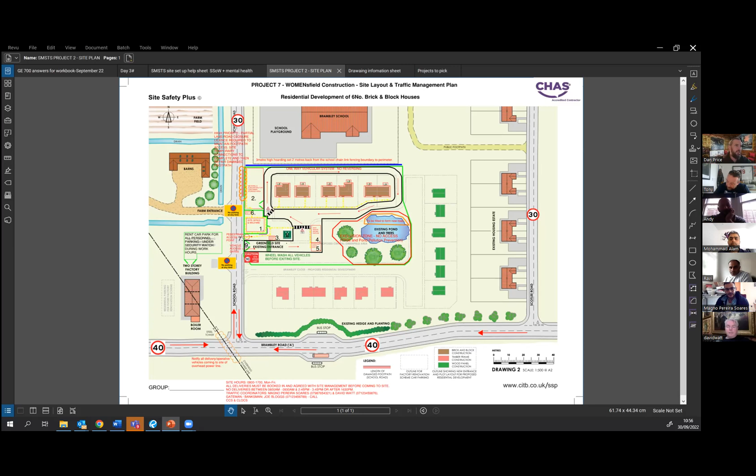So a little bit about the site plan, location and plan. Just to double check, you can see the screen and the layout here. The site is on the outskirts of the town of Bramley.

Our site here in the middle, these six plots of traditional brick and block construction is what we are building. Our green line denotes the perimeter and our site security. A little bit about the site: we've got a two-story factory building to the southwest corner, and there is planning consent for 18 housing on the greenfield site, 6 of which we are building. These 6 green buildings here are to be built, and these 6 pink are already built. So we're having to work in and around a live site.

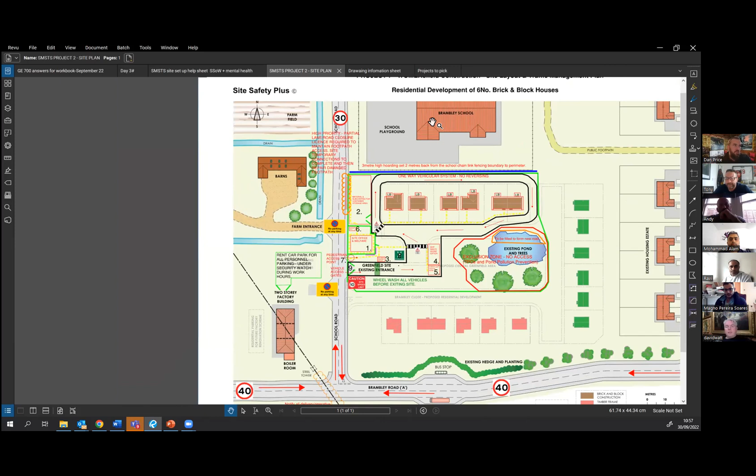Also to the north of site there is a school playground and a farm entrance here, which requires 24 hours, 7 days a week access, and some existing houses. Bordering the site is Scoter Road, a 30 mile per hour restriction, and 40 mile per hour on Bramley Road to the south, with an overhead power line which we'll have to coordinate and communicate with our supply chain and delivery vehicles to ensure they're aware of when coming to site, lorries etc. Then we have School Road, which gets very busy during school hours.

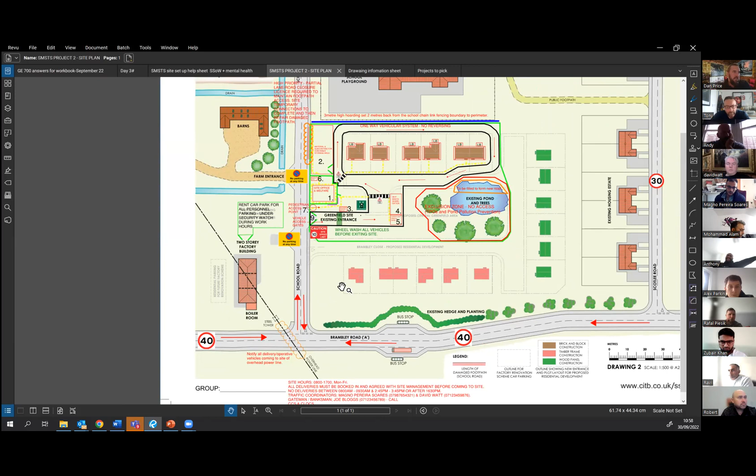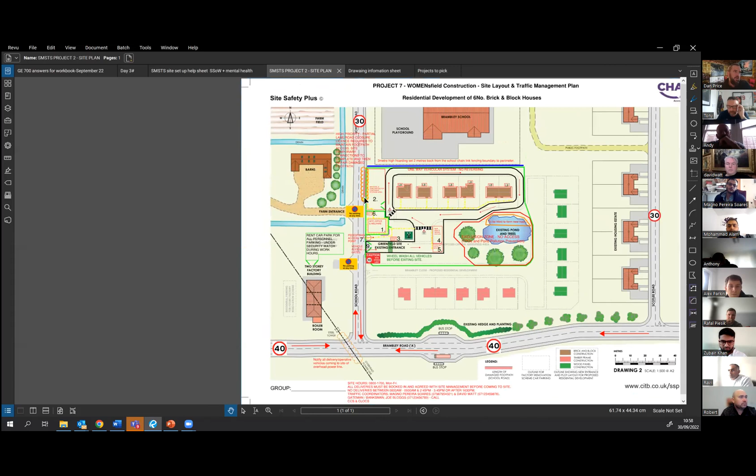So we've got certain restrictions, but I'll go through that later with the traffic management plan. There is a public footpath at the top here, which 60% of pupils use to get to the school. The other 40% use the path running by the site. So we're going to have to coordinate and carry out some works, and this section of pavement here is in need of repair.

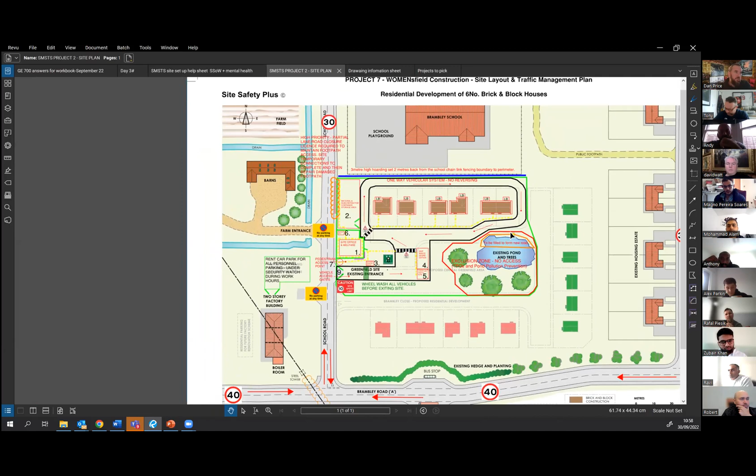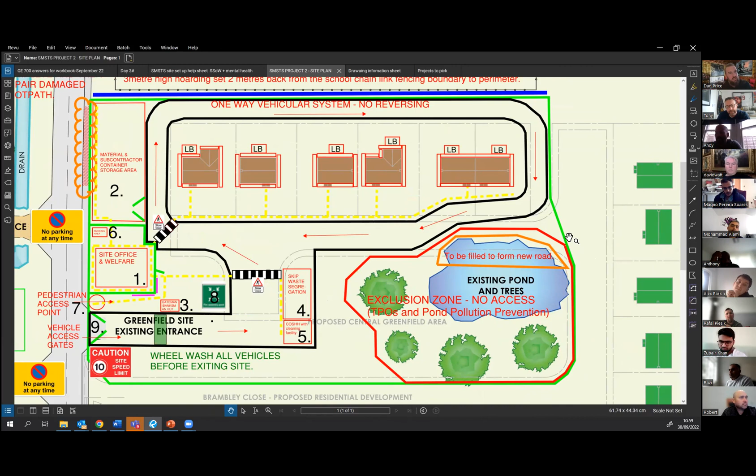So we've got some works which I'll go on to later. The ponds on site - this red line denotes the tree protection exclusion zone, and also this existing pond which we inherited, we will be filling in to a certain extent to allow us to finish constructing the roads to join the whole development together. So that's a little bit of insight on the building, our project, and the local surrounding areas.

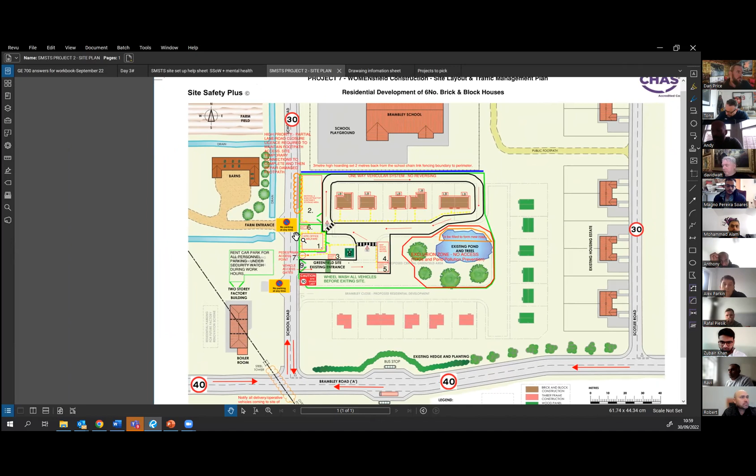I will pass you over to Andrew, who will go on to location of cabins. So in terms of the cabins, as you can see on the site plan there, they're numbered 1 to 6. We've placed these strategically for several reasons. Firstly, we wanted them to be as far away from the working area as possible, and equally away from the exclusion zone, which you can see is the lake and the trees.

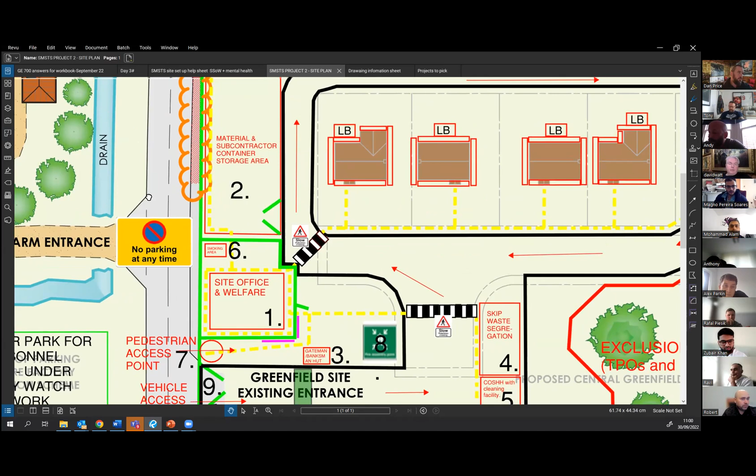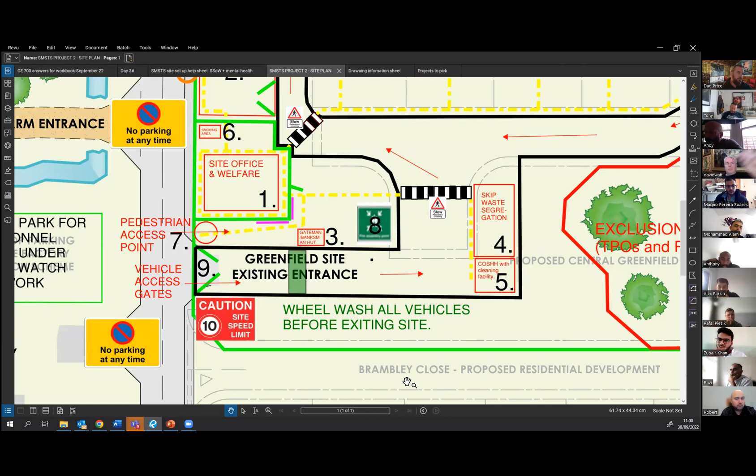We wanted them equally to be close to the entrance and exit point for security reasons, and because they're contained within the perimeter, they're obviously secure as well. In terms of the size of the cabins, we've based the size allocation on the amount of persons we believe we have on site at any one time, which is around the 40-person mark. Therefore, we've got 2 cabins.

Now the first one, where you will see it's number 1, says site office and welfare. This is actually one cabin with another one stacked up on top, and it has the access going up to the top of the scaffolding staircase, which is obviously handrailed and toe boarded.

The layout of the cabins: on the ground floor of office block number 1 that you can see on the map is the canteen area with the rest area - canteen and rest area, self-explanatory. On the first floor, you have both female and male toilet and shower areas. Sorry, I'll retract - on the ground floor is the site office, and within the site office it's got the first aid room as well. So just moving forward to the storage requirements.

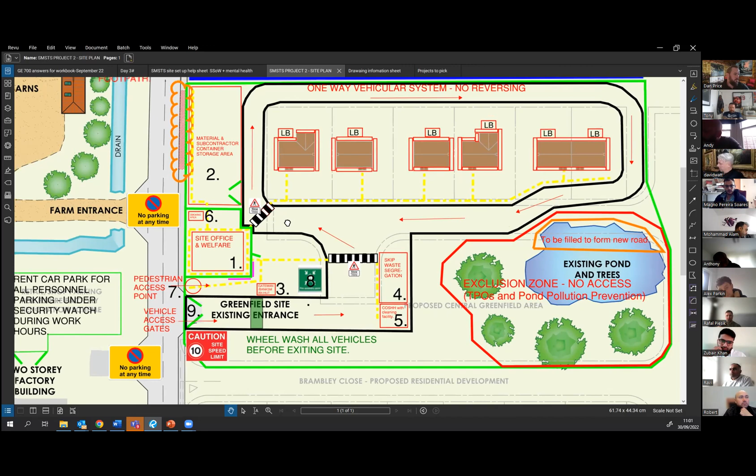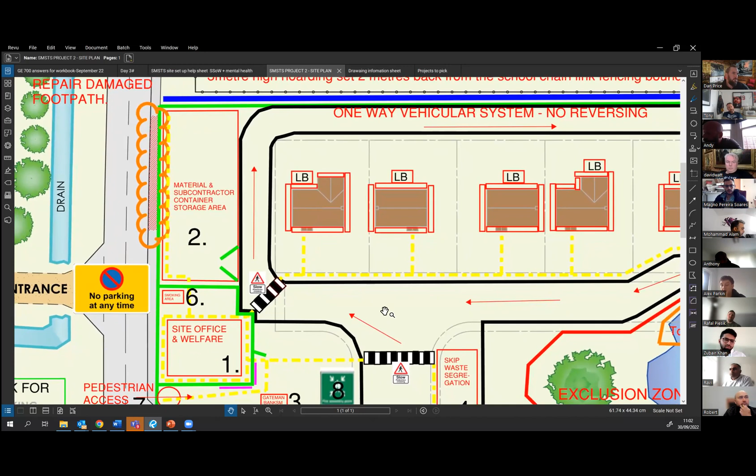So where you can see building number 2, which is the material and subcontractor container storage area, we've based this here, again, just for the reason that it's behind the site office and the gatehouse. So before you get any access to there, you're going to be inducted and vetted before you go on site, and therefore it's going to be known that the people that access it have been cleared and passed to be able to get inside.

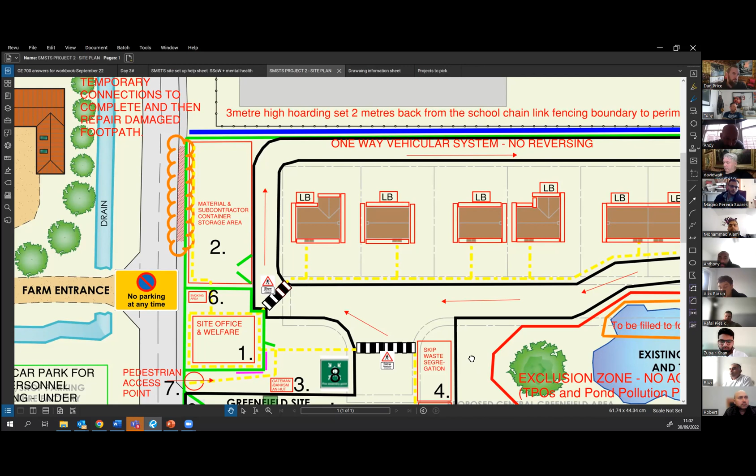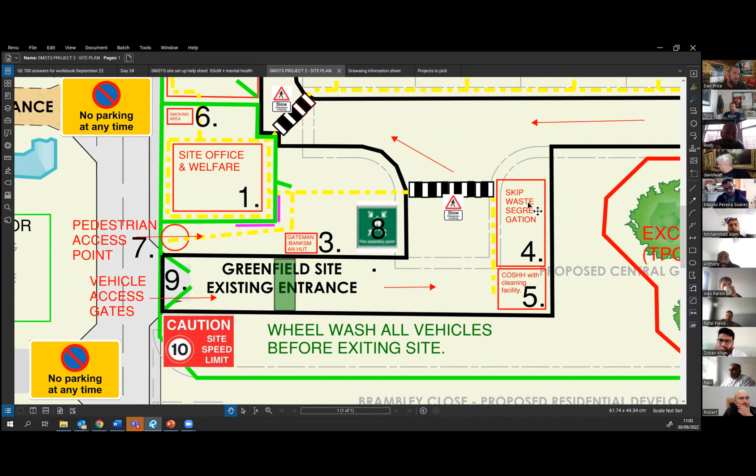Now, equally, as you can see, there's a road where you can see the little hand cursor. It goes along there. You can go along where it says Greenfield site existing entrance. You can drive up there, go up, and then turn a left. And you can see you've got a little zebra crossing bit there, but you've got one on the return as well between building 1 and 6.

Now, we've allocated the storage room there, so if we do get any deliveries, we can get vehicle or plant access up to there for unloading, which equally minimises the distance for manual handling to store the stuff within the store. Clearly, the objective for this is to upkeep sensible management of materials, reducing waste cost whilst improving site safety and helping to protect the environment.

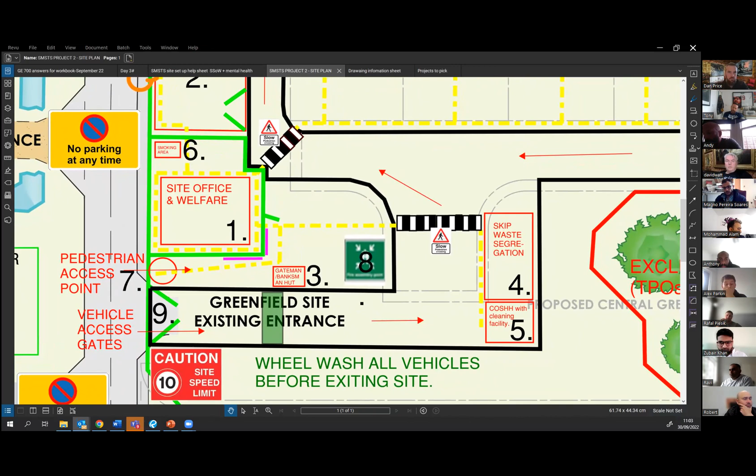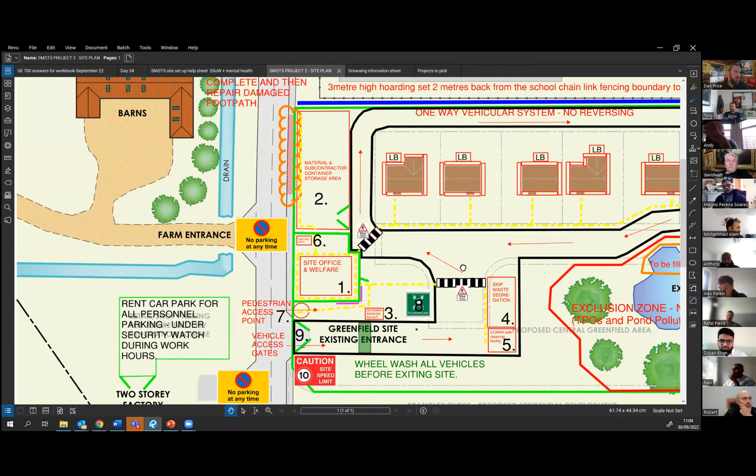So in storage number 2, which is the contents, again, we're trying to minimize this and not have excess surplus, just put in there what we can. The contents of this will be plant stored on a racking system. So as you walk in, you'll have a racking system on one side which will have plant on it, and then on the other side, you will have materials again on another racking system. So therefore, it will create an aisle in the middle, which will be easy to maintain and have good health and safety, and prevent any sort of trip hazards and bring any potential injuries down to a minimum.

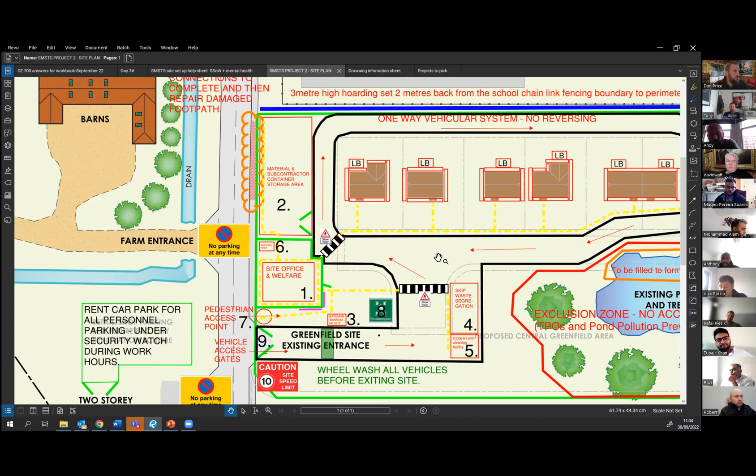Now, if you can look at building number 5, that's the COSHH storage. We've done that separate, and again, we've tried moving that further away from site. Equally, we've done it in the main route of the road there, next to the skip stuff, so we can get things in and out off the road for deliveries as well.

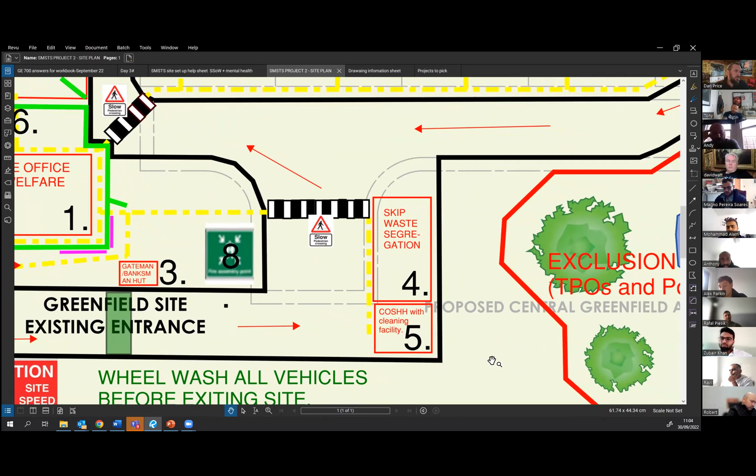Now, the COSHH container itself is an independent storage unit, and it's easily identifiable because it's got signs on the outside of it to show that it's for COSHH storage. This is a restricted unit and only trained personnel are able to access this. It's leak proof, reinforced, and specially designed to house its contents. Inside it, it includes a sump to collect any spillage as well.

So the contents within this storage will only contain anything potentially hazardous, such as flammables, liquids, gases and chemicals. The contents within this unit will be stored off the ground level in individual vented lockable lockers, whereby each locker will be labelled on the door as to what it contains. The objective of this storage unit is to store hazardous substances and isolate them away in a way that will reduce potential risk of harm to all persons on site, and allow the use of such substances to be monitored, with access to them totally restricted.

Just lastly, outside of the COSHH container, there is a cleaning facility as well, just to have a wash down, etc.

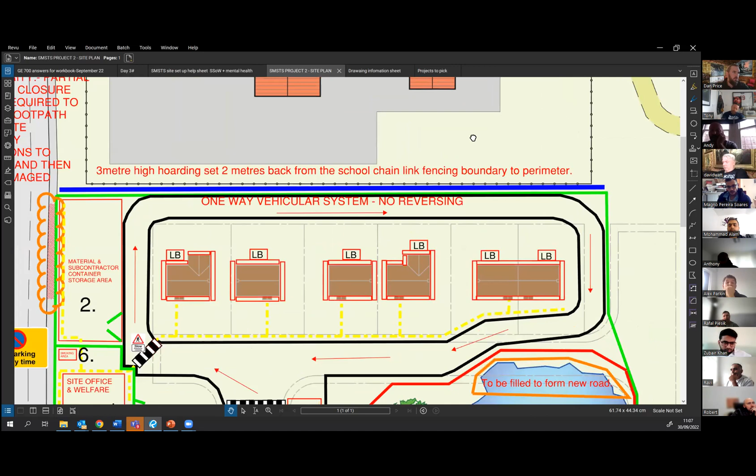As you can see from what Dan's mentioned earlier, we've got perimeter fencing, and the way this has been constructed is in a form of a timber frame hoarding going all the way around the perimeter at 2.4 meters in height. However, at the back where it's highlighted in blue, we've got that at a higher level of 3 meters, just because it's a boundary against the school there.

If you can just squeeze the picture so you can get a better view. Equally on the gate on building number 1, if you can just zoom out there, Dan, where you can see building number 1, where's the gatehouse? Number 3 is the gatehouse.

As you can see, the gatehouse is directly near the entrance of the site. This is staffed with 2 security operatives on a 24-hour shift rotation per day. Within the gatehouse, the security operatives will also be monitoring CCTV screens, which give them a visual on all areas on site where we've installed the CCTV cameras.

The communication within the gatehouse - the security operatives have a phone line with all the relevant phone numbers for staff, all the managers, supervisors, first aiders, etc. They also have a radio point whereby individual radios have been issued out to further security operatives that we have on the site.

Now, as you're entering the site, you can see there's a circle there - that's where we've got a turnstile. So any visitors, plant deliveries, or transportations will go through the main entrance. However, any visitors that are coming on foot will go through the turnstile, but either one of those will have to sign into the gatehouse first.

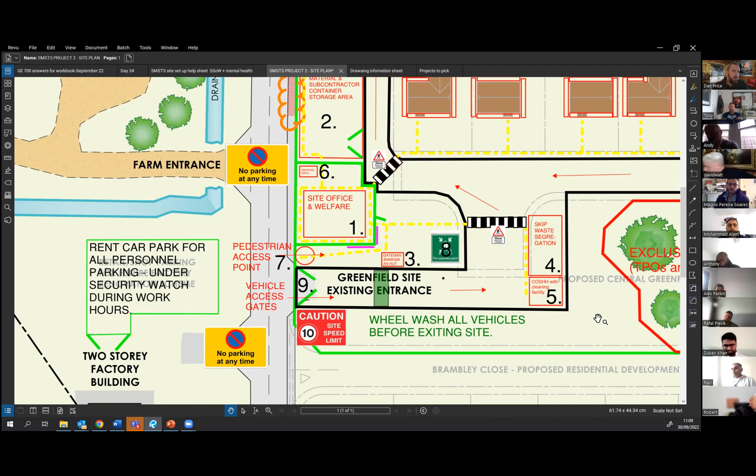Now, there are a few preventative measures - if the CCTV fails for any unforeseen electrical fault, we do have securities positioned within the site, and they're circling the perimeter of the perimeter fence there. So this acts as a kind of physical visual check.

Every hour we ask them to recommunicate with the site office just for a welfare check, and equally, as they're doing a visual around the perimeter wall there, they can also check to see if any of the wall has been compromised, taking into consideration that we are near a school, and on the main road there is a bus stop as well.

So in terms of lighting for security, we have positioned lighting around site, and again we've backed this up with a generator just in case there's any unforeseen electrical faults. These lights will be on the agreed hours of the daily site hours.

In terms of the security for the storage containers and the welfare buildings, all buildings on site are opened by the on-site security, and they are locked by on-site security at the end of the agreed hours of the working day. Now, the site security officers that we use are from a highly reputable company called Derlin Security. They're all former ex-military.

We did use a company before called Mansfield Security, but they've had a bit of a bad reputation, so we've managed to go with these guys instead. They're pretty good - they're fully trained, they're competent, they're vetted.

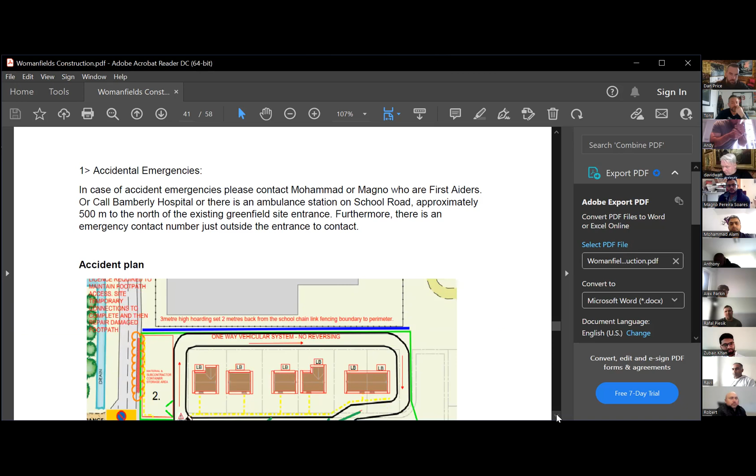The law is the Management of Health and Safety at Work Regulations 1999, which covers emergencies. For accident and emergency, the nearest hospital is Bamberly Hospital, and we also have an ambulance facility only 500 meters to the north of the existing Greenfield site entrance.

Now you can see the accident plan. In event of emergency, you see the green arrow that will direct you to point number 8, and point number 8 is green and shows the arrow, meaning it is an assembly point.

In the event of any accident emergency, the workers will rush to the assembly point, and there is an emergency contact number for Andy, the site manager. He can call a hospital or ambulance and sort it out. There are two first aiders, Mohammed and Magno, who can give first aid as well.

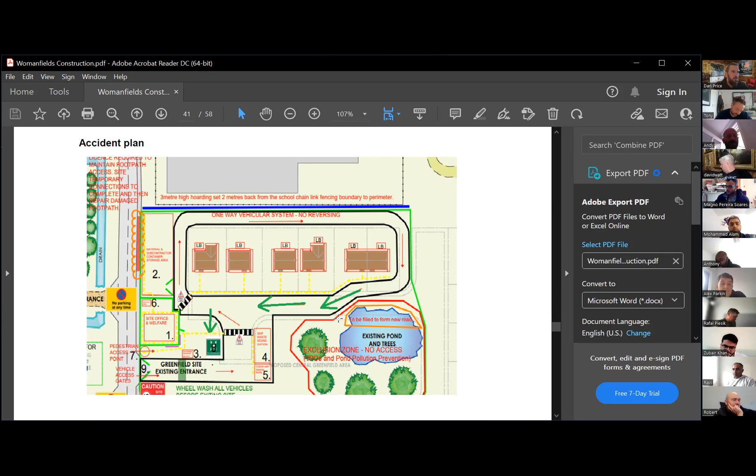For environmental emergency, if there is any COSHH waste found on site or any contamination, we can call head office, where we have a health and safety department who can arrange an environmental cleanup contractor to urgently attend the site.

For fire emergency, if there is any fire, we can call the fire brigade, and we have got a fire brigade package for that. And the site manager has an emergency contact number.

In case of emergency, the site safety manager is Mohammed. You have their number, you can call him. Nearest hospital is Bamberly Hospital, nearest police station is Bramley Police Station, and nearest fire station is Bramley Fire Station.

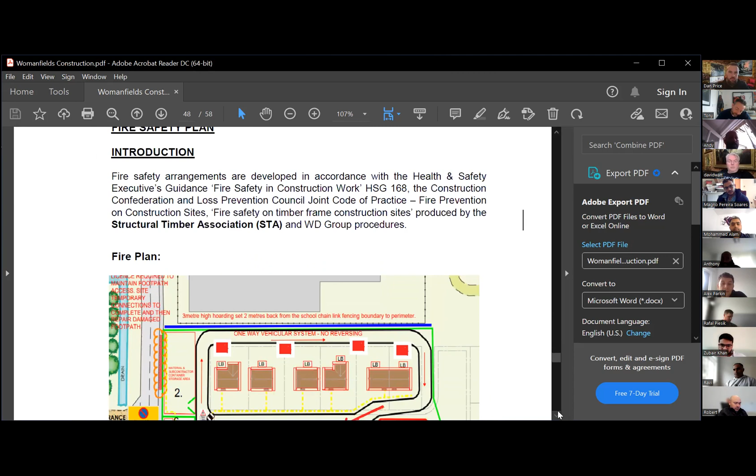That's a health and safety fire plan sheet. Fire safety plan: you see the red line, that's the fire escape route, and it's the same as the accident emergency plan. The fire escape route directs you to the point of assembly.

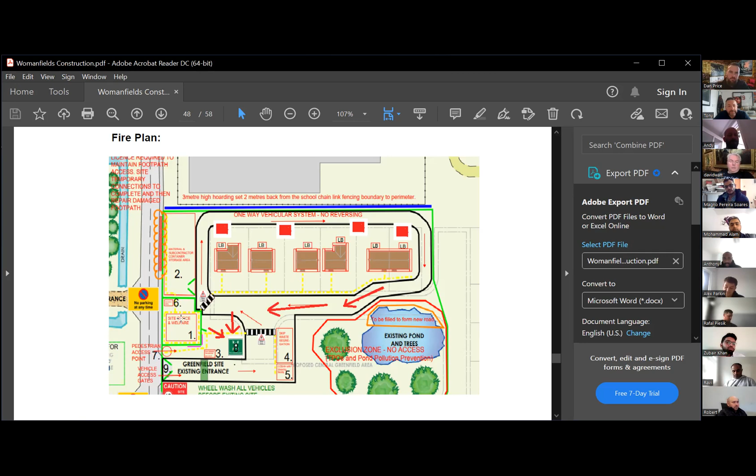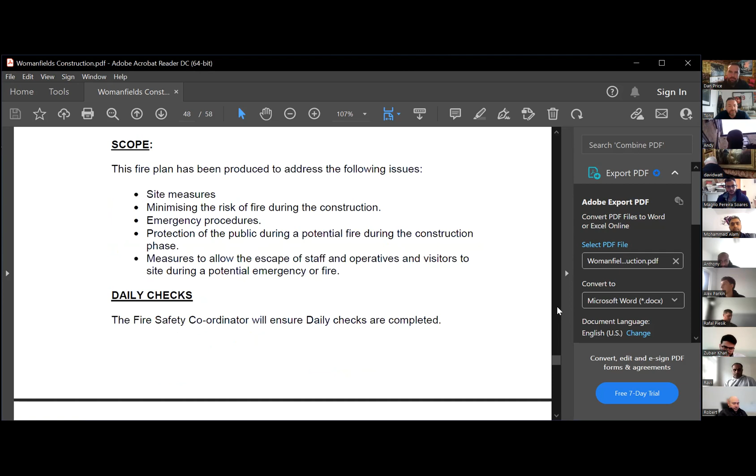We have got some daily checks, weekly checks, and monthly checks. For the arrangements of our fire safety, we have access arrangements, fire points and firefighting equipment, which I have shown behind the building and at point number 7.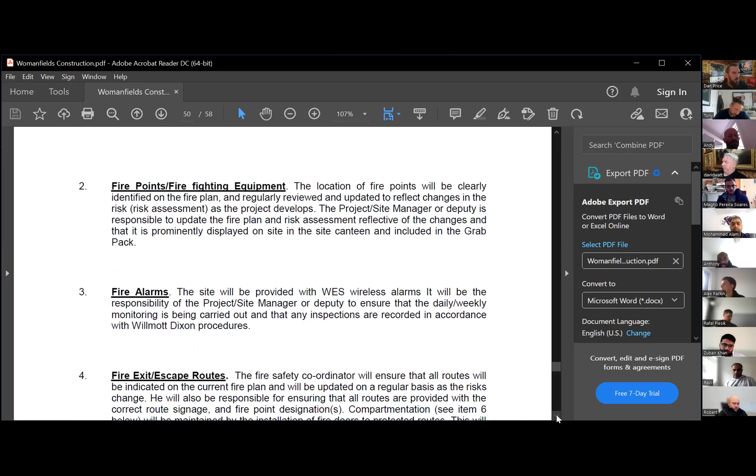Fire alarms are at number 7, where you can trigger the alarm. The fire escape route I have shown you with the red arrow, and the assembly point is point number 8, which I have shown you.

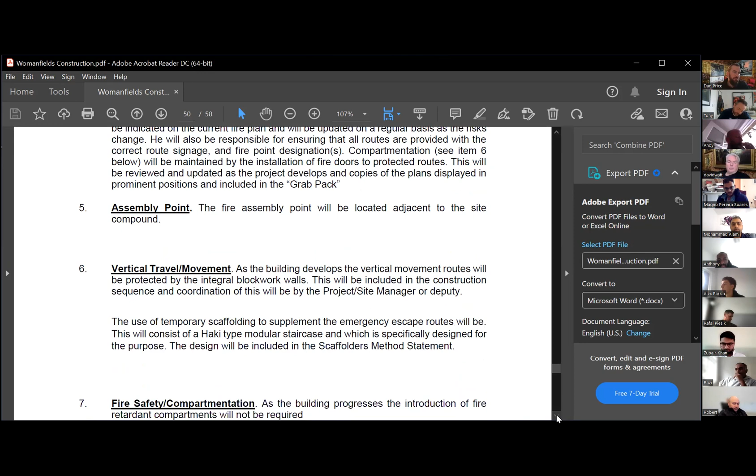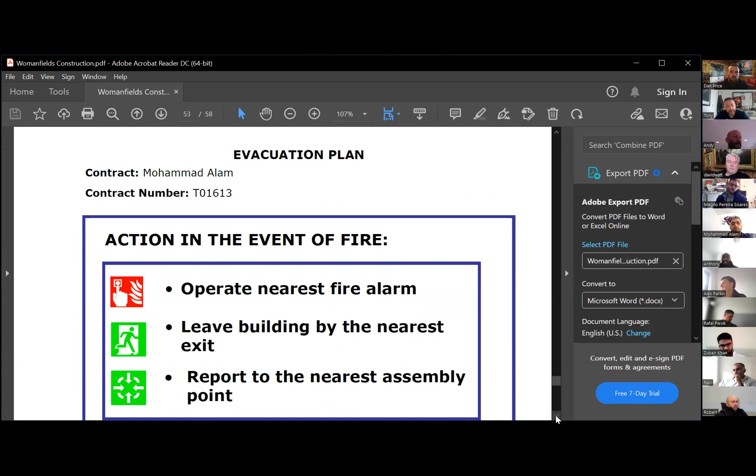That's our evacuation plan. In event of fire, at point 7 we have a fire point and the alarm is there. We can operate the fire alarm — every building has got a fire alarm — we can raise it from there.

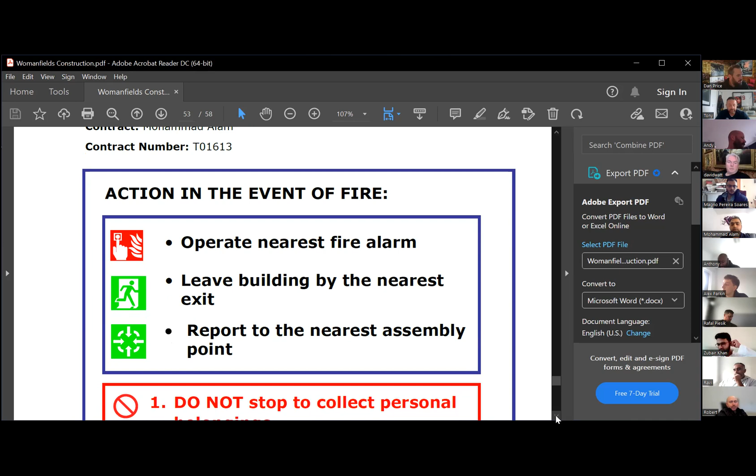Leave the building by the nearest exit, which has been shown by the red line, and report to the nearest assembly point, that's point 8.

The don'ts: we have some don'ts. Don't stop to collect personal belongings. Switch off all powered equipment, and do not enter until told it is safe to do so.

Now I hand over to the next person.

Okay, just wary of time, so I'm going to share my screen again. As part of the introduction, I ran through the layouts and the arrows. I'll just delve in a bit with more detail, but I'll make it short and snappy.

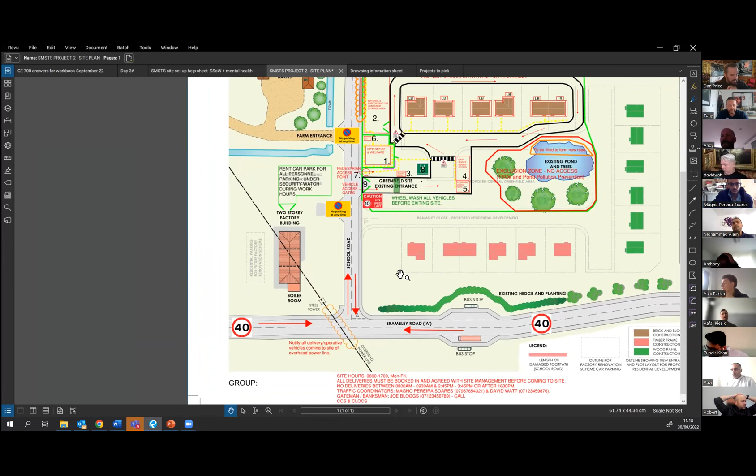Direction of traffic: logistically, this project is difficult. Obviously we've got a school, we've got school drop-offs and school collections. A few notes down the bottom here — we've got site hours between 8 and 5, Monday to Friday.

Communications in orders, we will place stipulations that all deliveries will be booked in with the site management before coming to site, and they'll be restricted to no deliveries between 8 and 9:30, 2:45 and 3:45, or after 4:30. Obviously we don't want to be offloading at 4:30 and still there till 6.

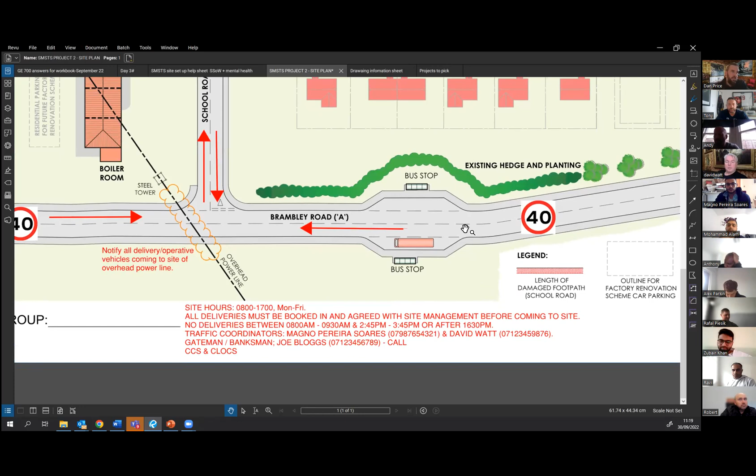Deliveries coordination and management via our gateman on the site gate with pedestrians and vehicle access. We have traffic coordinators who will monitor, take any complaints or issues raised by the surrounding public, field them, review, monitor, and then go back with an answer as to what we're doing to correct any potential issues. Best wills in the world, there may be some issues, but we will do our best to nip them in the bud as quickly as possible.

Our gateman, banksman Joe Bloggs will be contactable, and that will be on the front of the orders as well, so that any delivery drivers, any vehicles coming to site will be able to communicate and let them know they're coming, so he can be ready to get them onto site, offloaded and back out. So we're going to coordinate all of the deliveries to site.

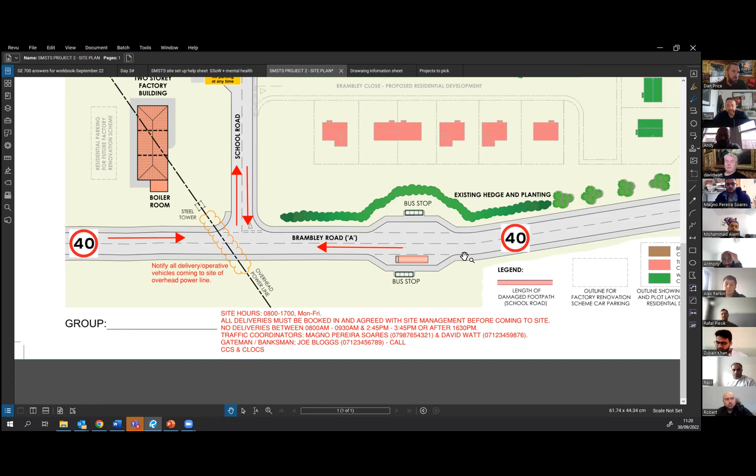We've got the 30 mile per hour, 40 mile per hour zones. We've got the school road, which gets very busy, cars parked along here during the hours of school drop off and school pickup. Factory building is live, so we have no parking here, hence why we're just in time deliveries with vehicles coming onto site, not backed up, causing chaos along the road.

We've agreed in principle to rent this piece of the car park for our operatives, and maybe a bit of lay down materials, etc. It'll all evolve for the lads to come across site and through the turnstile.

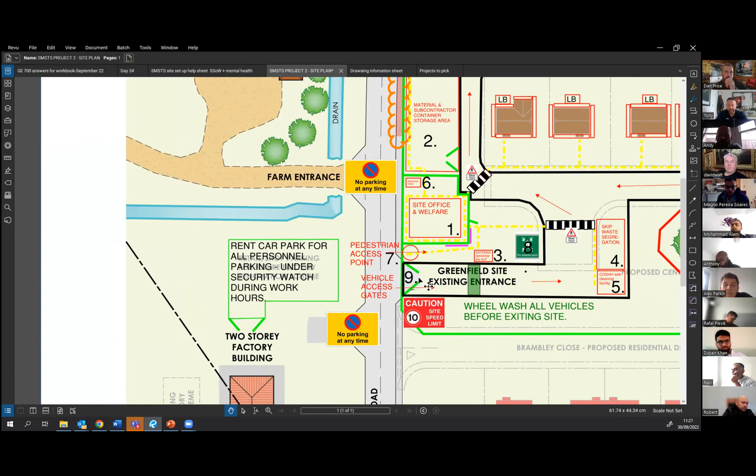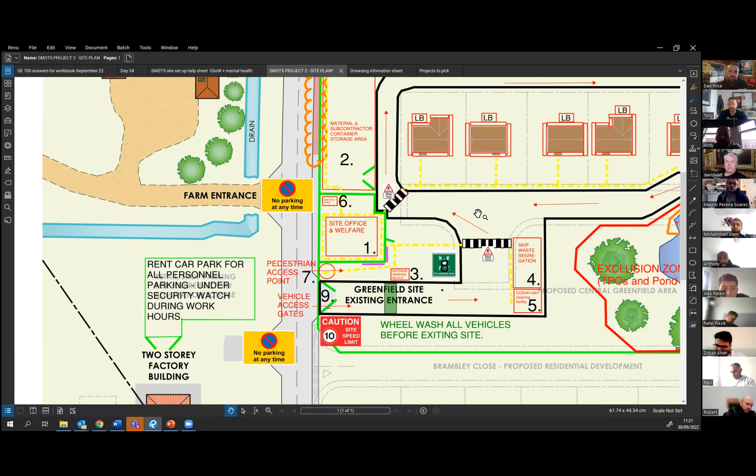When we're on site, we have segregation, so pedestrian segregation and vehicle segregation. We always lose if we come into contact with moving plant and machinery, so we segregate that, and that goes on through site. This yellow dashed is pedestrian routes, which will be clearly barriered off with metal barriers to delineate and demarcate pedestrian routes so that plant doesn't veer into their paths and vice versa. We have pedestrian crossings set up and signage as required.

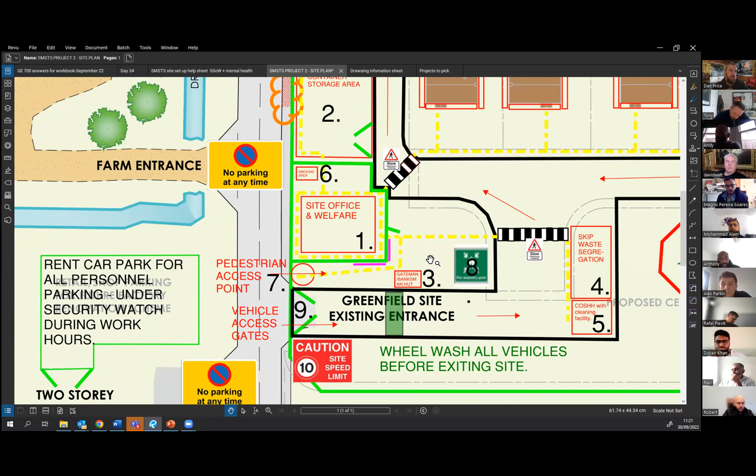Pink is the notice boards, so daily, weekly updates as works on site and hazards evolve, change, and just so everyone coming through gets a good visual, can see what's going on site, and keep them aware and up to date on what is going on site.

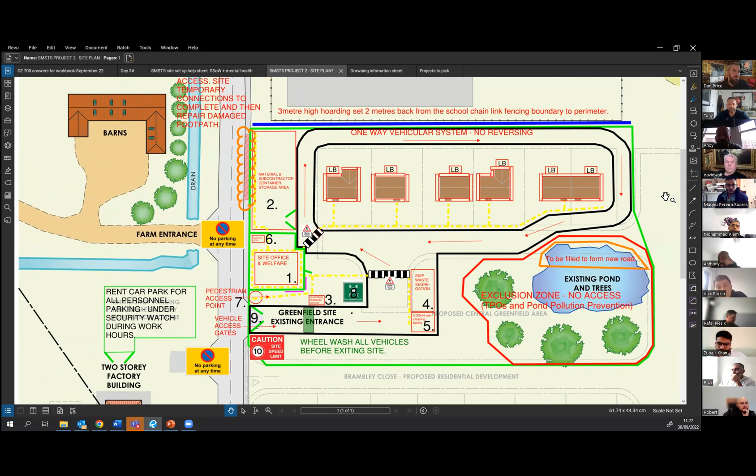When they're on site, we have a one-way system in place. This will change throughout the time frame of the project as we progress, but we'll try to avoid reversing at any point, and always continue on forward travel with any vehicles, offloading into the container storage area, designated area.

Housekeeping is key, important. All trained personnel, CPCS cards and certificates of competence.

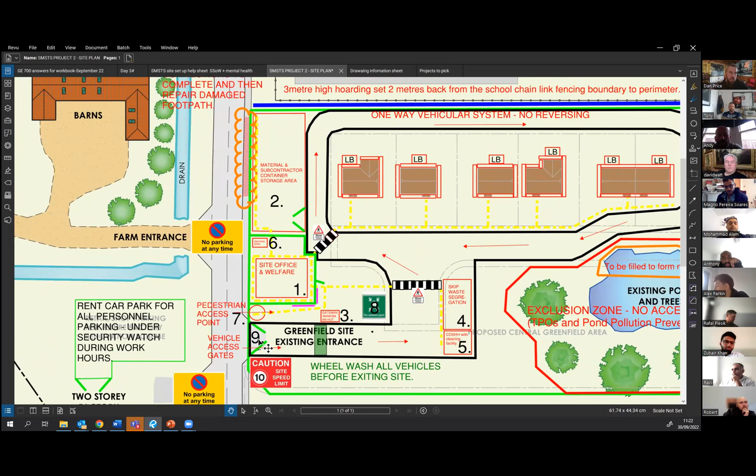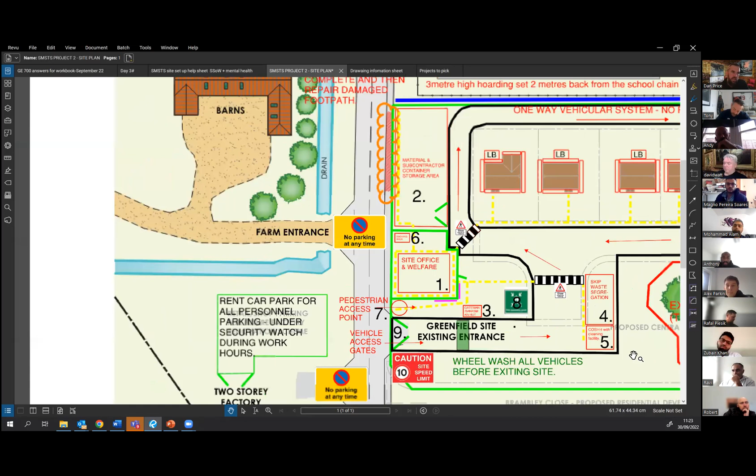On their way out, as it is a greenfield site, there will be mess, although we plan to lay stone and make all these roads temporary to remove the chance of any soil being tracked back out onto the road and us having further complaints. That goes back to being part of the considerate constructor scheme, and abiding by the rules and guidelines in that. At the exit, before they leave, there'll be a wheel wash, so we'll wash all the wheels off again to prevent mud and mess being dragged out onto the public highway. If needs be, we've got an order set up with a road sweeper to sweep the surrounding roads again.

Was there anything else? Just have a look. Speed limits, segregation, crossing points, monitoring systems. Done for me on traffic management.

Onto document control. As a standard on document control on our sites in the office, document control - the following documents will be held on file in our office during the life of the project. I'll go through the important ones. The construction phase health and safety plan, the F10, due to our project being notifiable, and the CDM regs with the timeframes and durations on site.

Risk assessment method statements for all the supply chain will be submitted, signed off and filed in alphabetical numerical order for easy access. There'll be a first aid needs assessment. Mohammed's gone through the fire risk assessment and all things fire and emergency procedures, which will also be stored on file.

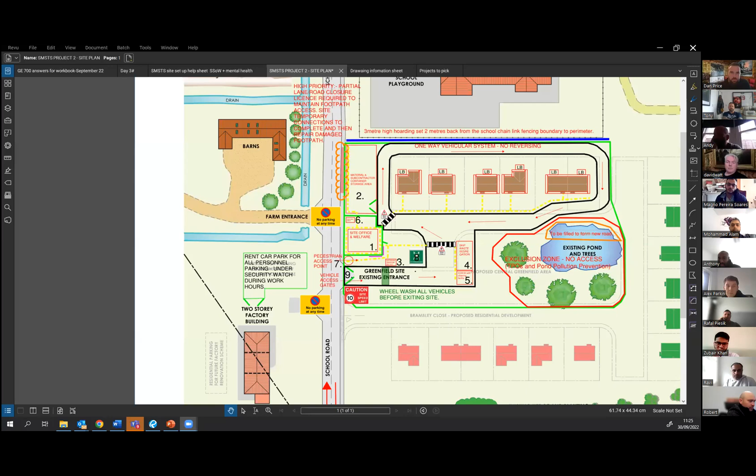As Andy said, the site manager, the welfare office is positioned where number 1 is. It's a large two-story construction. The top floor is a site office, and underneath we've got the whole of the ground floor, which is a large area.

It's divided into two. The first part is the canteen room and welfare restroom area with notice boards, and the other half is the shower block, changing rooms and lockers. We've got 20 lockers in there, but they're subdivided in two, so in effect you've got 40 lockers altogether if needed.

The canteen consists of 42 seats. The tables seat 6, so there's 7 tables. There's 42 chairs, 3 microwaves, and 2 hot water heaters.

We've got a welfare notice board on display, along with a health and safety work poster, a first aid poster, naming the first aiders and the nearest hospital, which is Bramley Hospital. We've also got, just for the social side, a poster for a staff trip to Mansfield, but so far there's no takers on that one for some reason.

Don't know why. We've got the cleaning stations. There's 2 cleaning stations with antiseptic wipes and lotions, positioned both at the front of the welfare office and the back, where there's a smoking area. There are actually 2 entrances, one in front and one at the back, so we positioned a sanitizing station on both.

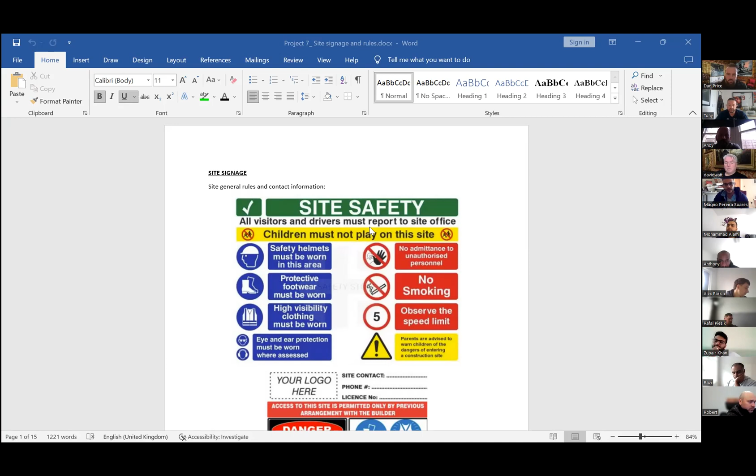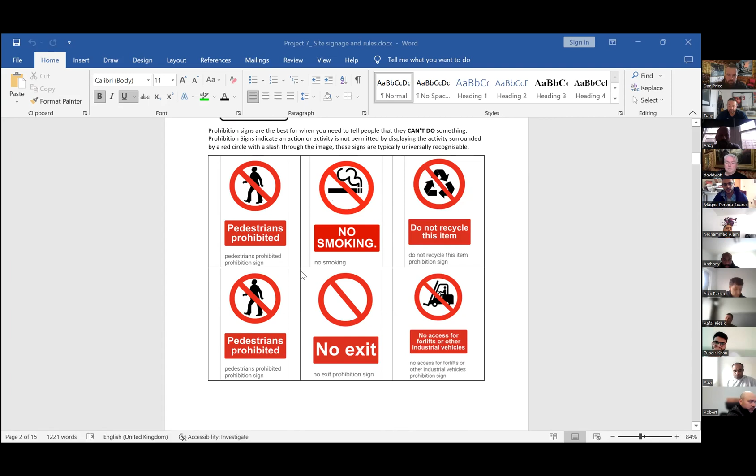Prohibition signs, which is when a person must not do something on site. So we've got different signs here for pedestrians, what's not allowed.

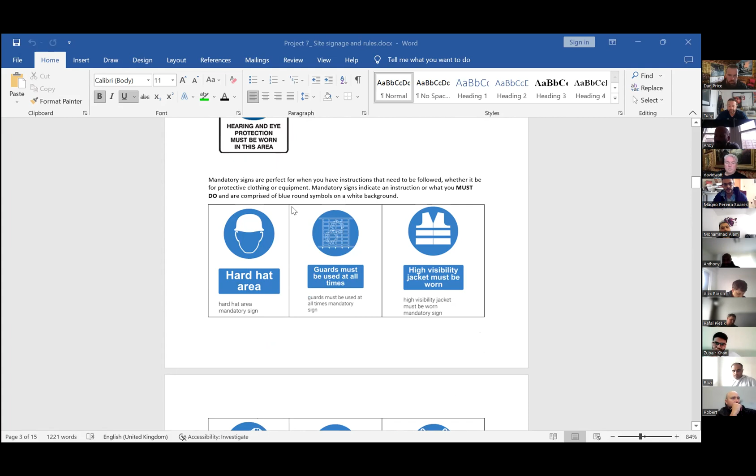Also mandatory signs, it's more to actually give instructions so the person can do what it's supposed to do. There are many signs for PPE or different instructions to be followed on site.

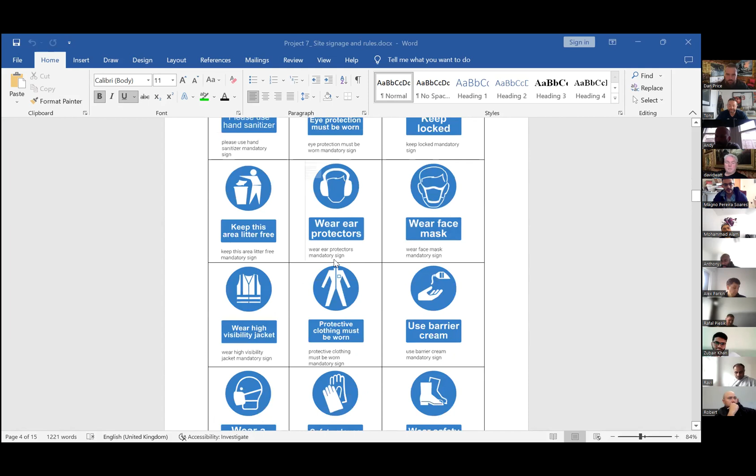Those are all mandatory signs, and limitation or restriction signs also. These are more to set a limit, whether it could be for speed or depend on a specific value also, and this would be used for traffic.

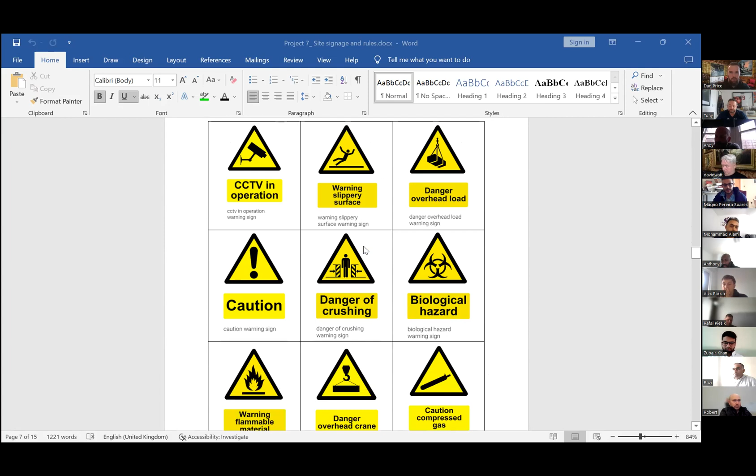And also the warning signs, which is signs that are warning about danger situations or hazards, even information about products, emergency information, safety signs also. Normally it's green and white.

And also the fire safety signs, which give instructions about the direction to find the extinguishers and fire alarm, the emergency telephone, and also the site rules.

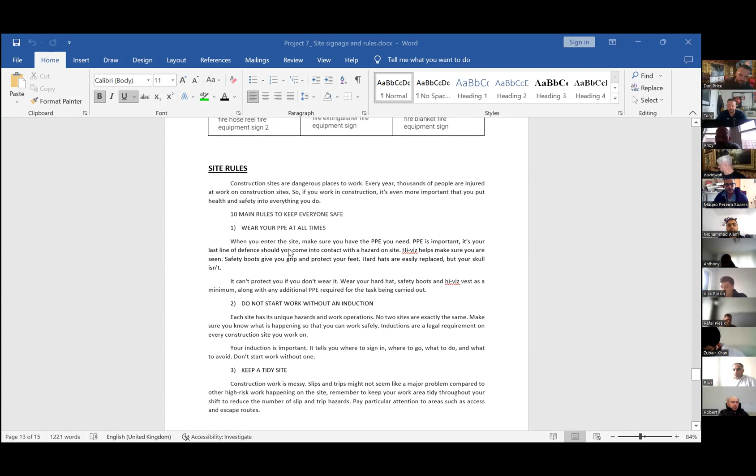Actually, we've got plenty of different rules, but all of them are to keep people safe. Yeah, that's the main purpose of them. Wear your PPE at all times. Do not start working without the PPE. So this is a rule. Do not start work without an induction. Another rule. Yeah, keep the site tidy and organized to avoid hazards.

Never put yourself or others at risk. Follow safety signs and procedures. Never work in unsafe areas. Report defects and near misses. Never tamper with equipment. Use the right equipment.

It's just giving information about the right equipment, because sometimes carrying out a task without the proper tool could be dangerous for the person or others around. And also, in case of doubt, always ask a supervisor or someone who is competent, who has information about it. And we have different other rules, but basically it comes down to the safety of all people on site.

Yeah, that's it. I'll pass to the next.

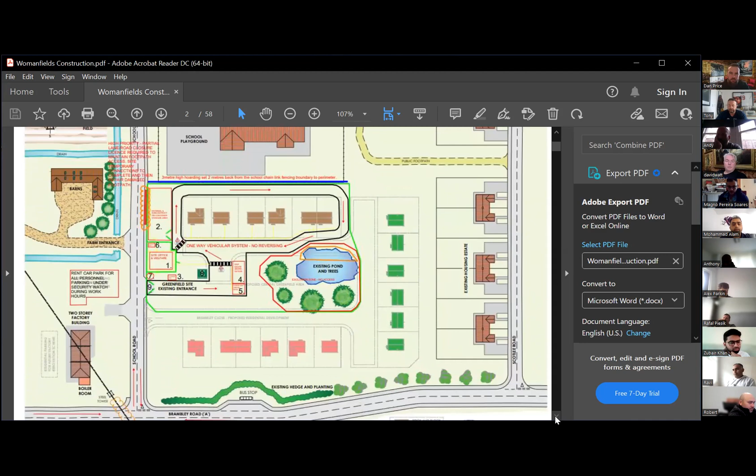Now I come to the site layout plan, and everything has been explained already. I'm not going through it again. That's the site plan.

Site access: the site access is from the school side road, and the site office and welfare facilities have been shown, and the toilets - the facilities are there. I think David has mentioned them.

If there is any green zone, the green zones are for pedestrians. The smoking area is next to the site entrance. We have an assembly point at point number 8.

Nearest hospital or ambulance: the nearest hospital is Bramley Hospital, and there is an ambulance station approximately 500 meters to the north.

We have got a login logout register book.

And guidance: you're responsible. Be aware that along with the employer, you are responsible for your own and others' health and safety at work. Fire - be aware of fire hazards. If a fire breaks out, raise the alarm, leave by your nearest exit.

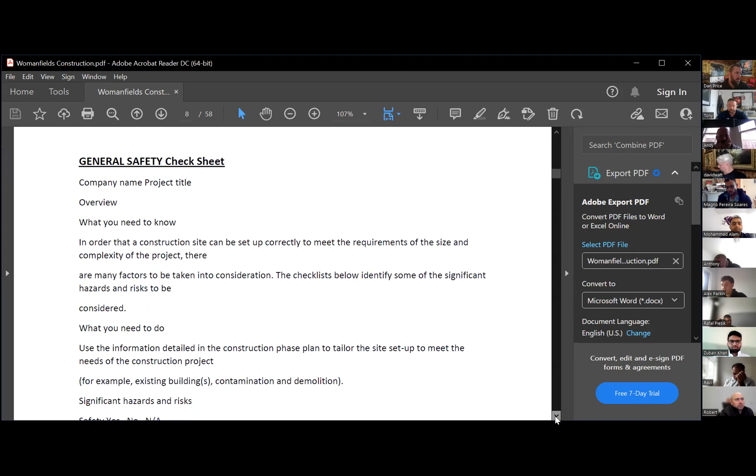This is the general safety check sheet. Can safe working areas be provided? This is what we need to check on site. Is there a secure working area, and areas for storage material and waste skips? We have a waste skip that has been shown.

Are there adequate emergency escapes? That is the fire escape plan and accident emergency route that has been shown as well. Is there a suitable fire plan? Yes, we have a suitable fire plan and rescue plan for it. And risk assessment has been done.

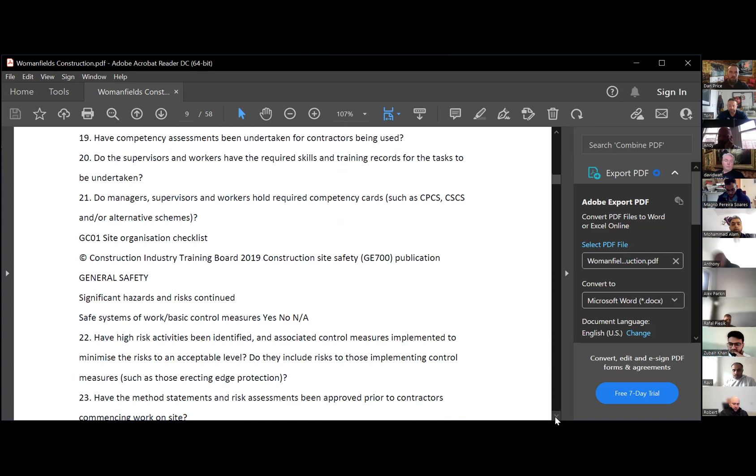We have welfare facilities. Do managers and supervisors require a competency card? Yes, we have the CSCS card and black card, and SMSTS card for the site managers.

Is there a register on site for statutory inspection? Yes, as I said, we have a login and logout book. And at the end, name, position, and signature.

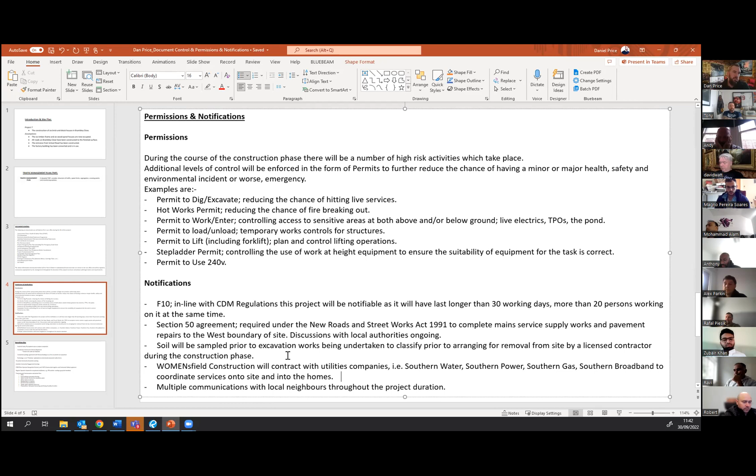We'll also contract with utilities companies - Southern Water, Southern Power, Southern Gas, Southern Broadband - to coordinate service onto site and into the homes. Again, that will cause some disruption in the highway, which will need certain section agreements to allow those works to be undertaken and completed.

Throughout the project, there'll be multiple communications via newsletters, social media, whatever means necessary, and a notice board, to communicate with the local neighbours, schools, and companies about site works and upcoming activities, to make sure we're coordinating our works with them, and being a considerate contractor, minimising our impact on them.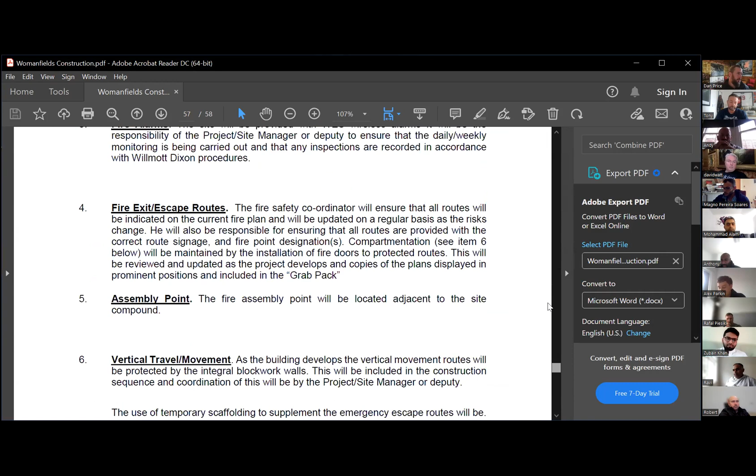Okay, brilliant, thank you. So this is Womanfields Construction Limited's mental health and well-being policy, to promote a positive environment that promotes and supports a positive state of mental health and well-being for our employees and those who we work with.

The policy aims to promote good mental health and well-being of all staff through effective communication of our policies and best practice, to increase the awareness of our workforce regarding issues associated with mental health and well-being, and to provide support to all staff experiencing mental health problems while in employment and upon returning from absence, while preventing discrimination.

So how do we achieve these policy aims? Womanfields Construction Limited will promote a culture of good mental health and well-being to all staff through effective communication designed to raise awareness and understanding about mental health and well-being in construction, by implementing measures at all levels of our organisation to provide a workplace and culture that promotes good mental health, by listening to our staff and adapting workplace policies as required, and implementing the policies and evaluating them through employee feedback.

We'll have feedback forms in the welfare office, so employees can give us feedback and tell us how to improve. It's an ongoing process to always improve what is already a very robust policy.

So how do we put this policy into practice? Well, first of all, we ensure that any employee suffering from mental health illness is treated fairly by the company, with respect and confidentiality, without discrimination, by offering flexible working arrangements where practicable, working with employees to create a culture where bullying, harassment, discrimination and racism is not accepted, and providing training and awareness of everyday contributory factors such as stress and excessive workload that undermine your mental health.

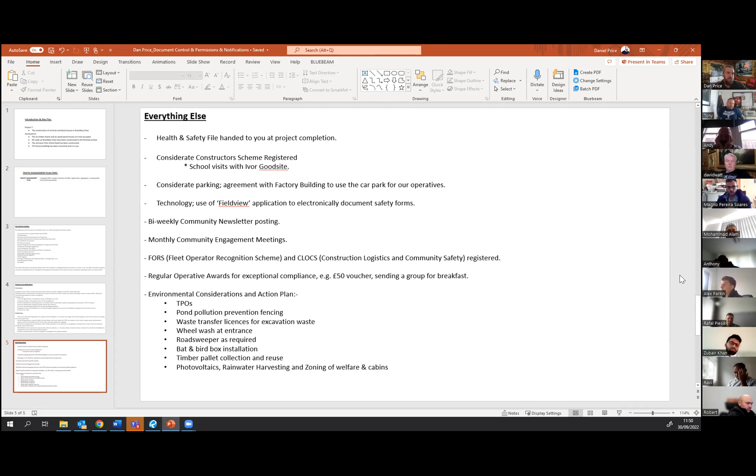Environmental considerations - obviously we've got to consider our TPOs, trees, pond pollution prevention, hence why we've got the fencing, logging of waste transfer licenses for any excavation waste. We've got the wheel wash, road sweepers, and we're going to put up some bat and bird boxes. All of our waste timber will be taken off site, collected and reused rather than go to landfill. We may put photovoltaics, rainwater harvesting, and zoning of welfare cabins to make them more efficient and minimise their environmental impact. That is additional things we've considered as part of our submittal to yourselves.

That is the end of our presentation.

Right guys, before we go any further with the questions, let's give that a round of applause, as is traditional at this point. Well done. Okay, so can I introduce, or can I encourage, should I say, the first question please?

Can I start first, please? This is Robert. Oh, Robert. First guys, I'd like to say well done. I've seen a few good points, to be honest. Like some of them, we never thought about them. So one would be the very good visual well represented pedestrian vehicle segregation. We also mentioned it in our presentation, but yours is really well detailed. Well done with that. What do you mean your presentation?

It's been a detailed and comprehensive presentation, to be honest. It took a bit longer. We've seen that. Have you got any questions? This is a question and answer session.

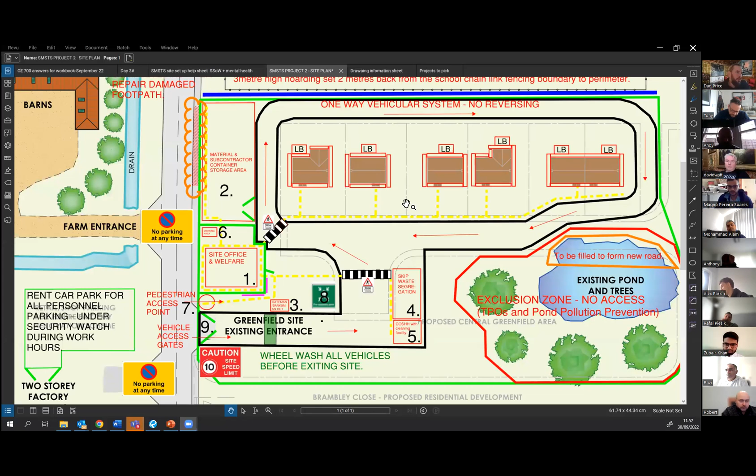Yeah, site office and welfare facilities. You represented it as an area, but physically there, I think you need some kind of L-shape facility. First, you need to have 3 containers: one for the toilets, totally separate; one for the canteen, totally separate; and one for the site office. So you're going to have 3 units in there - either put them in an L shape or stack them on top of each other.

They are stacked on top of each other, Robert. So on the ground floor you've got the site office, and upstairs you've got the showers and the toilets. Would you think it would be better to put them the other way around?

No, I mean it's personal preference, isn't it? Logistically, when people come onto the site, they're not going to walk straight in and go to the toilet - they're going to want to go and see the site management, aren't they?

Yeah, fair enough. Okay, COSHH area - the second one with the COSHH area. Do you think that might have a kind of hazard, let's say, for any traffic, possible traffic accident? If we have, for instance, a lorry or truck with bad brakes or something.

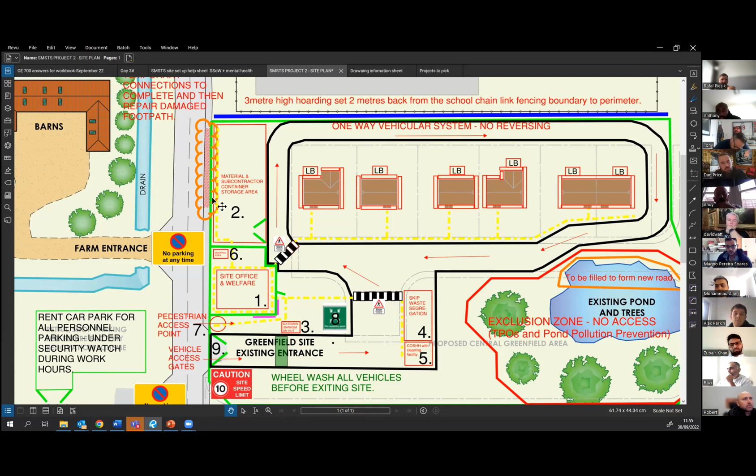Yes, that's our temporary supply, and then for our permanent supply, we'll have to come off of this Brambley Close road, which is already built - there are services running through there, so we can bring them onto site as well. So yeah, that is considered. We've got our temporary supply, and then when we switch over to the permanent, we finish up the project. Brilliant, you cover everything. Good.

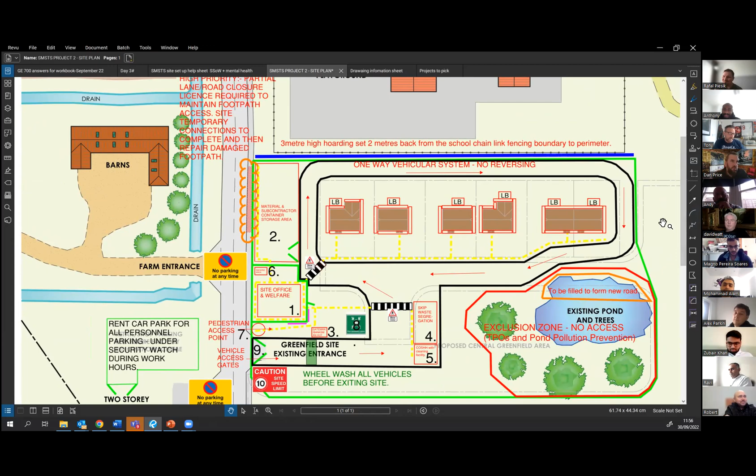And that's 5 minutes, guys, so that's it - we haven't got any time for any more questions. So yeah, sorry, guys. May I ask something? Well, it's up to... go on then, why not?

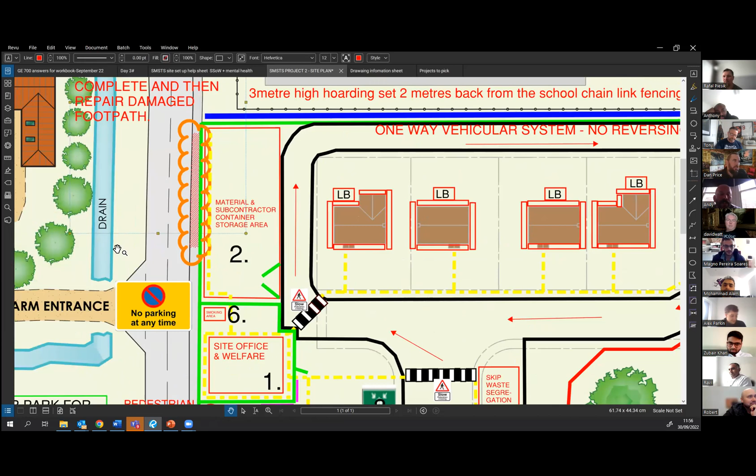Where do you think you're gonna fix that path? Sorry, when do you think you're gonna fix that path? That will be early in the project, along with infilling of this pond to form this road - so that'll be earlier in the project. But obviously we've got to apply for the license, and that takes between 6 and 12 weeks to come back, so we could be waiting any time.

Are you gonna put any... Raf, you asked for one question. Okay, pushing it.